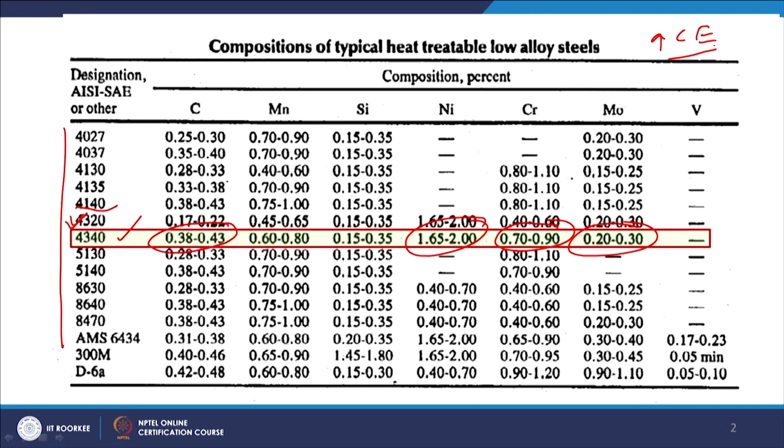So say the 4340 grade of the heat treatable low alloy steels has a significantly higher percentage of carbon, 0.38 to 0.43, so roughly 0.4% carbon. Chromium is 0.8% on average, 0.25% molybdenum, and nickel is 1.65 to 2%. So high concentration of these alloying elements in this typical grade of steel will be leading to a higher carbon equivalent, so increased tendency for martensitic transformation.

As I have said, what different phases will be formed during the cooling of the austenite to room temperature will depend upon the cooling rate being experienced. If the cooling rates are high, then we will have complete austenite to martensite transformation. If it is somewhat lower, then we will have phases like a martensite and bainite mixture.

If further lower cooling rates are realized using a higher preheat temperature, then we will have phases like ferrite, martensite and bainite. Further lower cooling rates will allow us to have martensite, ferrite, pearlite, bainite in this typical 4340 grade steel. This is the continuous cooling diagram for 4340, which indicates how the cooling rate can change the kind of phases which will be formed.

So, higher the preheat temperature, lower will be the cooling rate, and accordingly softer phases will be formed. If the cooling rates are high, only martensite; otherwise martensite plus bainite; martensite, ferrite, bainite; martensite, ferrite, pearlite, bainite; and too low cooling rates will lead to ferrite and pearlite only.

So, these phases will be determining the hardness, and the temperature at which these transformations take place will determine the possibility for escaping of the hydrogen and will reduce the residual stresses. Higher the transformation temperature, lower will be the residual stresses induced, especially if the martensitic transformation is avoided.

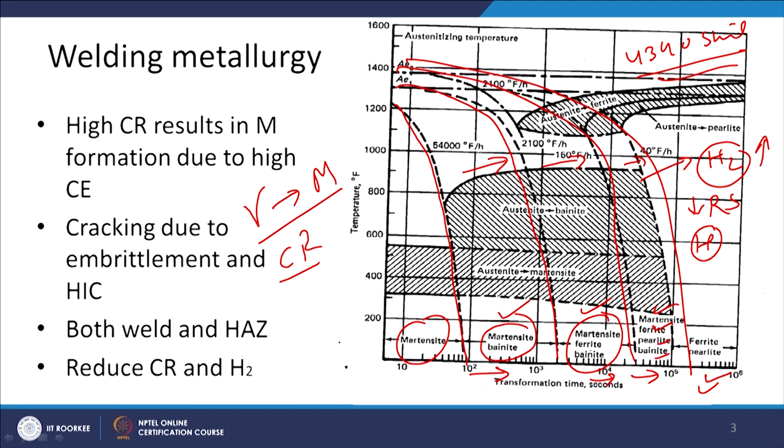So, it is always good to have suitable cooling rates, so that we can have some soft phase formation in the weld as well as the heat affected zone, so that the cracking tendency and embrittlement tendency of the weld joint can be avoided. As I have said, these are the factors which we need to see while taking a decision about the kind of preheat to be used.

So, say for the different grades of the heat treatable alloy steels, and for different thicknesses in inch, we know that the higher the thickness, the greater the preheat temperature we need to use, changing from 50 to 250. And likewise, increasing the carbon equivalent will lead to the use of higher preheat and interpass temperatures. So, greater the thickness and greater the carbon equivalent, higher will be the preheat temperature.

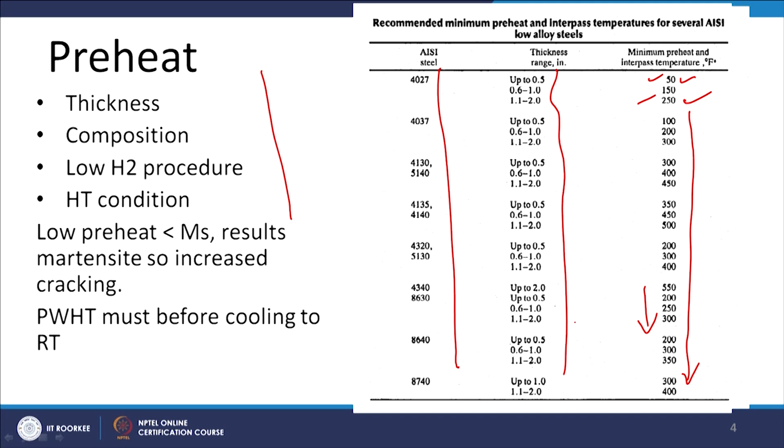So, this is how we can choose, and we know that the preheat temperature we have chosen will dictate the cooling rate, and accordingly we will have martensite, bainite, pearlite, ferrite in the weld joint. So, especially if the weld joints have martensite and bainite, then subsequent post weld heat treatment becomes important for two purposes.

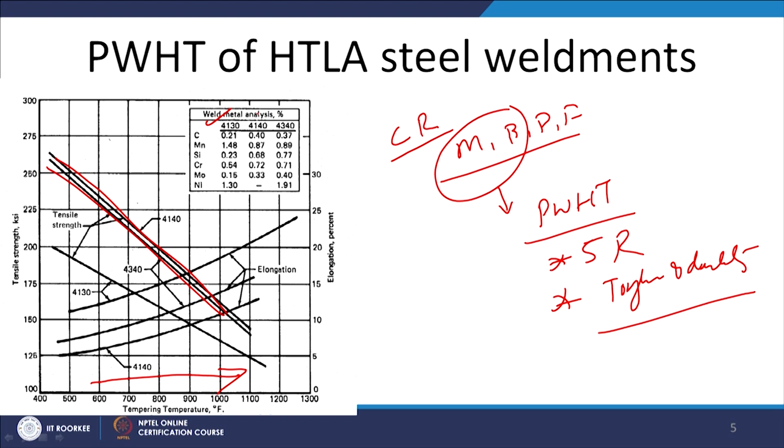One is to relieve the residual stresses if these have developed in the weld joint, and the second is to induce suitable toughness and ductility in the weld joint. So, in this post weld heat treatment where tempering of the weld joints is performed, increase of the tempering temperature simply reduces the tensile strength of the different grades of HTLA steels. On the other hand, there is a continuous improvement in the ductility.

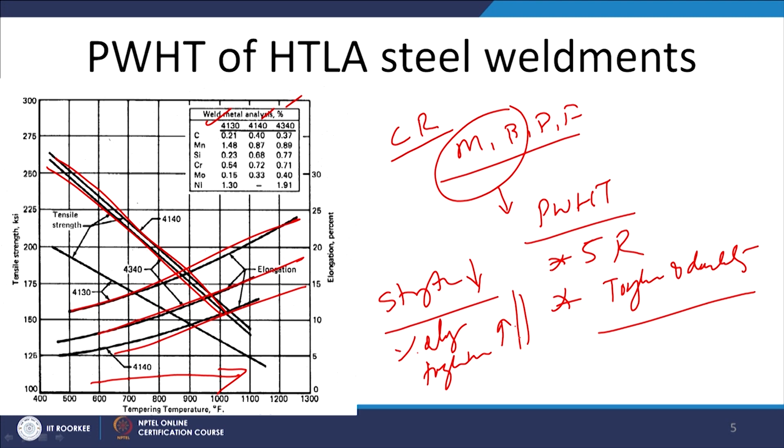So, in general, with the increase of tempering temperature, strength decreases, while percentage elongation and toughness improve. Now, let us see how the preheat temperature is selected, and what if the post weld heat treatment is possible immediately after welding, and the situations where it is not possible.

So, as one case, if the preheat temperature which is possible and being used is greater than about 50° Fahrenheit above the martensite start transformation temperature, then since this is above the martensite start temperature, it will facilitate complete austenite to bainite formation. Bainite being comparatively softer than martensite, it will reduce the hardness, the residual stresses, and the hydrogen content in the weld metal. So, it will simply decrease the cracking tendency.

So, if possible, use a preheat temperature greater than 50° Fahrenheit above the MS temperature, that is the martensite start temperature. And if this is not possible, like the preheat temperature is less than the MS temperature, then certainly some amount of the austenite will be transforming into martensite. That will depend upon the value of preheat.

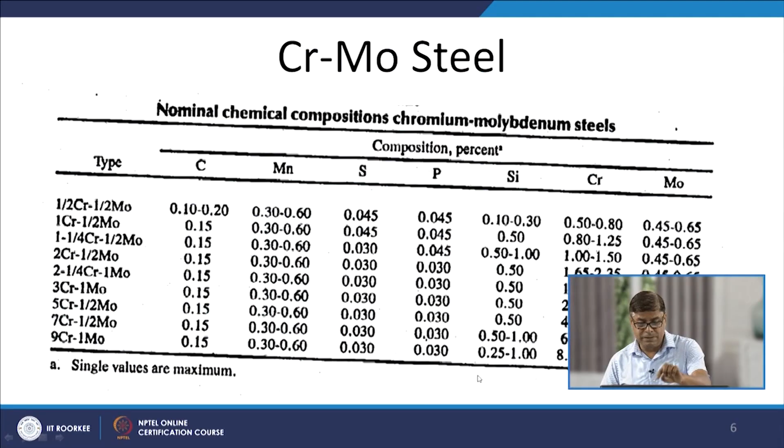Now we will see the most common grades of chromium molybdenum steel. The first grade is 0.5 chromium, 0.5 molybdenum, having chromium in the range of 0.5 to 0.8 and molybdenum 0.45 to 0.65. Likewise, there are different grades. One of the grades is 9 chromium, 1 molybdenum having 0.15 carbon, with chromium in the range of 8 to 10% and molybdenum 0.9 to 1.1%.

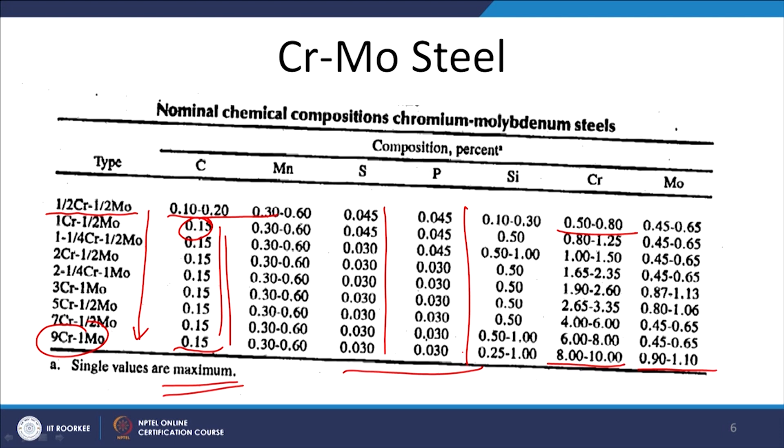The single values show the maximum possible content of that particular element. So in these grades the maximum content of carbon is 0.15%. Wherever a range is given, it shows the allowable range for that element, like the maximum allowed values of sulfur and phosphorus, 0.03 or 0.045%, in order to avoid solidification cracking tendency of the weld joints. As I have said, these steels are used at higher temperatures and offer quite good ductility and very good strength.

As per the form of the steel, we have a very wide range. These chromium molybdenum steels have ultimate strength in the range of 60 to 115 KSI, yield strength of 30 to 100, and elongation of 13 to 18 percent. So these have quite a good combination of strength and ductility.